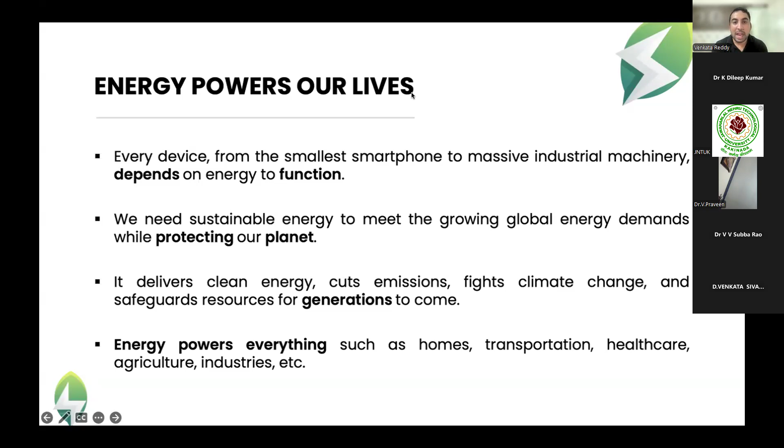And particularly what happens is we should think about these energy requirements, or the replacement of the non-renewable, whichever the space that we have - important topic and need of the hour that we are talking about. Everyone knows the world is moving towards these sustainable development goals, and most business people, entrepreneurs, and governments are all talking about the sustainable development goals.

Even renewable energy - this is SDG number 7, affordable and clean energy. Either way, we may reduce global emissions while utilizing these energy sources. So moving more onto these sustainable development goals, with that said, renewables on different scales - what is the present, what is the future, and how this is going to be - we are going to talk about that.

So the biggest challenge when people talk about this energy demand, I would like to bring to notice that AI is everywhere now. We talk about artificial intelligence, ChatGPT, LLMs - everyone building different solutions, but behind these AI solutions there's a biggest challenge: they need a lot of training, a lot of data, and a lot of support system to run. In the USA, a lot of data centers have been placed and created, running short of power, consuming maximum power generated from oceans, nuclear plants, and different energy sources. This is one big challenge that we have.

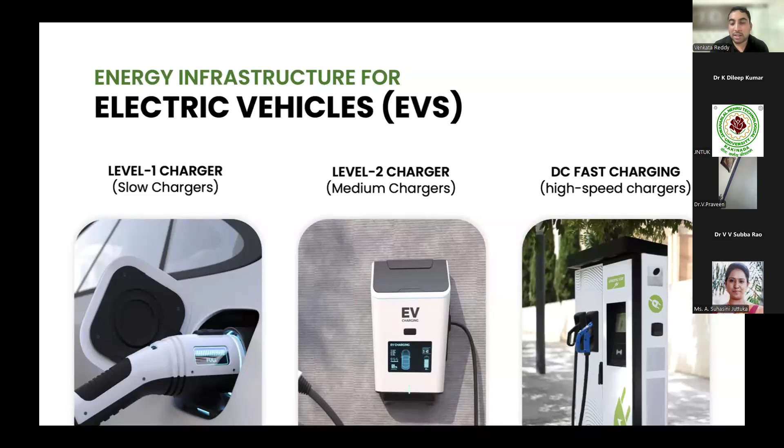So I am just touching on a few important resources required where energy demand takes on a higher scale. One is communication. Earlier it was just letters and things like that, but now communication has become top notch. Most of you know about WhatsApp and Facebook - one day they went down for half an hour to an hour, and the whole evening everyone was trying to communicate. Now communication itself has spread across the globe - satellites and all communication stations require an uninterrupted power supply.

So in coming days, there is a huge requirement for this energy, and we are extending this energy - everyone knows this, it's very common. Two problems I'm bringing to notice, where new kind of smart solutions are needed, or in the long run we need very uninterrupted supply, because without a mobile phone for an hour, 45 minutes, or half a day, I think the world goes into a panic situation. That is how we have to make sure all our energy resources are 100% effective.

So taking these three as major problems, and in order to give solutions, though we have other alternatives, I would like to propose the general renewable sources we commonly talk about: solar energy, wind energy, hydro, biomass, geothermal, tidal, and the present world is also talking about hydrogen.

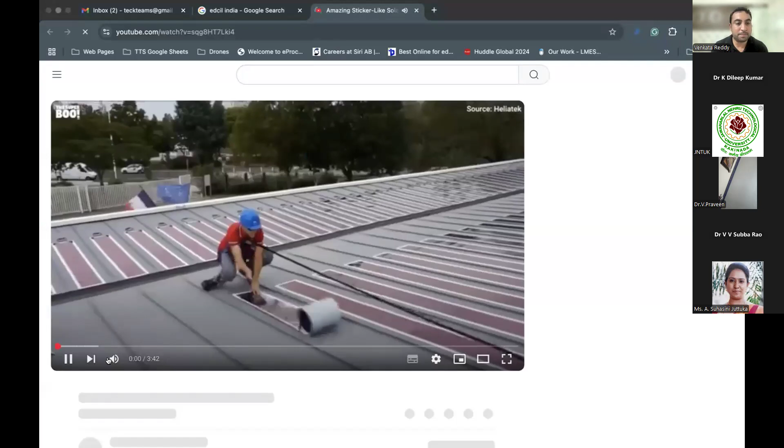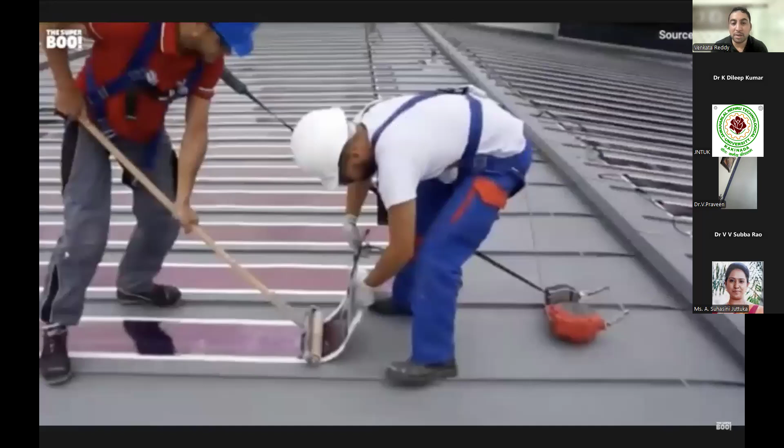When it comes to this, I have one link which will help us to understand. Let me show you this. Here you can see the new kind of art of solar panel, which can be placed at any place.

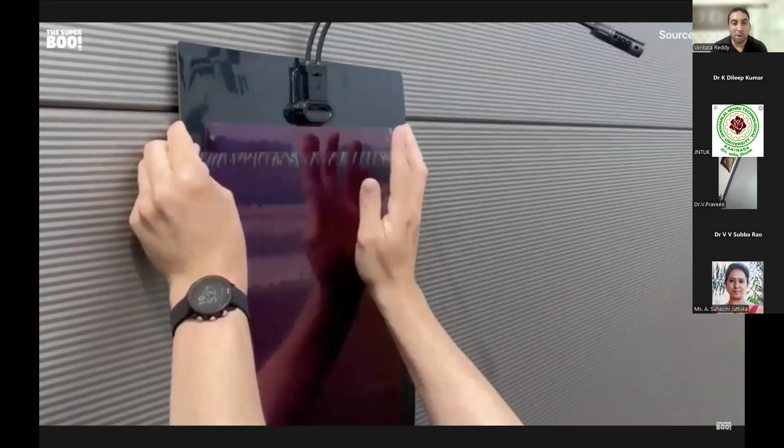Now you can see they are putting it on walls, using the same photovoltaic cell. Those are much more flexible than the traditional ones we are using, and you can stick it to any place, generate energy from any point, and it has more flexibility in the cleaning process as well.

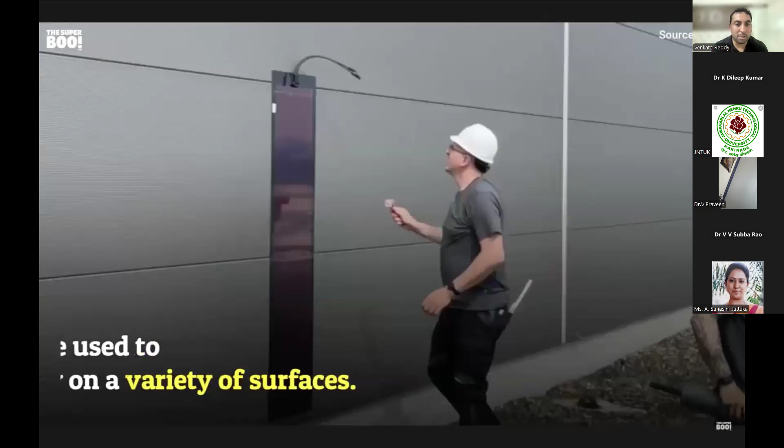If you observe, there is one company who has designed solar panels with this flexibility, and now I think Elon Musk has also come up with another panel which looks like glass. Those glasses can be used like window glass, and see how simple it is to fix.

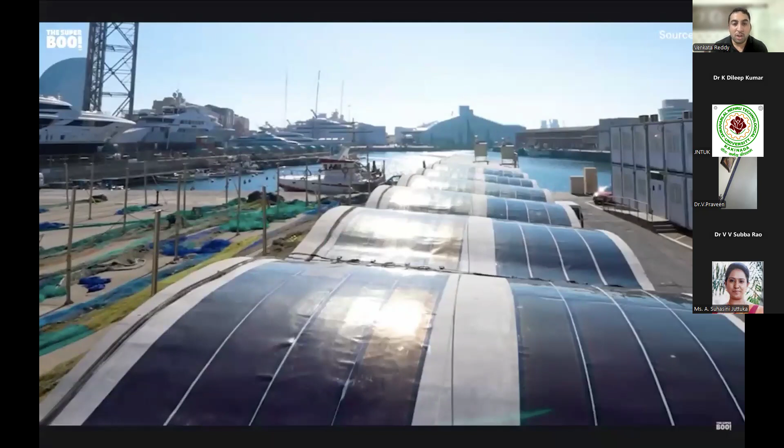Earlier it used to take a tremendous process, like you have to carry heavy things and go through a mechanical setup. You can see on the rooftop how this flexibility is there, as these kinds of solar panels come out and stick on.

So it's a company called HeliaSol by Heliatek. If you see that OPV, there's more next.

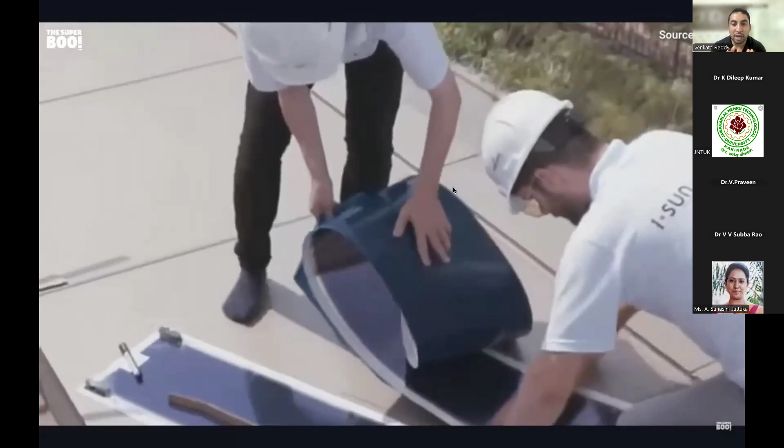Even the wind turbine—of course we'll talk about hybrid solutions also—but before that, you can just go through an understanding of individual smart solutions that are coming out. You might ask, like, what is the wattage, what is the panel, or what is the cost and all.

That all depends upon the application and the place where we are going to utilize it, that we have to look at. So they are using some organic material here. You can do some research on this and understand how these panels can be flexible in our country, where we have massive home locations.

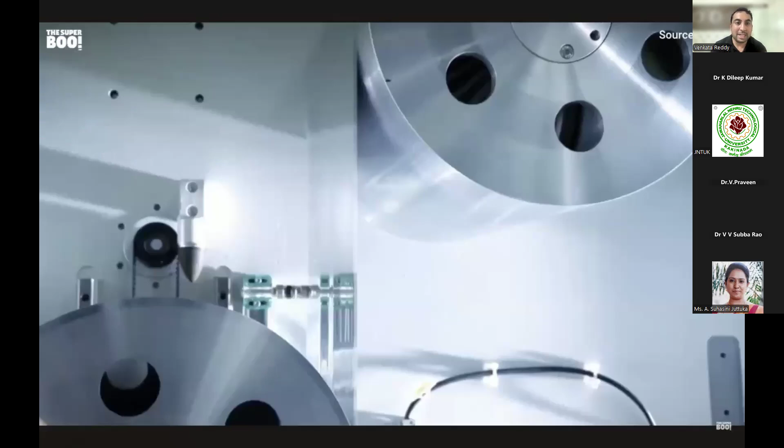If you can understand, the simple wall has been made into a solar panel wall right now, and it doesn't take too much time for them to install it. So this is how the flexible solar panel has come out.

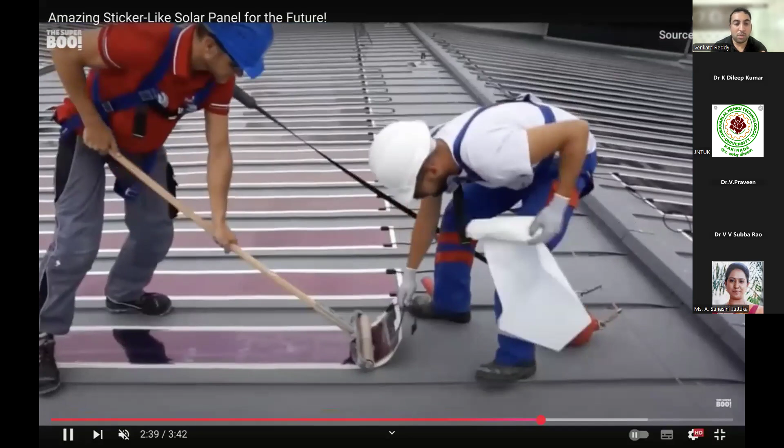So when compared to a regular format of solar energy that we take, or gigawatt units or megawatts that we pull out, these are the different kinds of solar energy systems that we have. And the example that you have seen is the smart solution that has come out, making it easy, and you can put it anywhere.

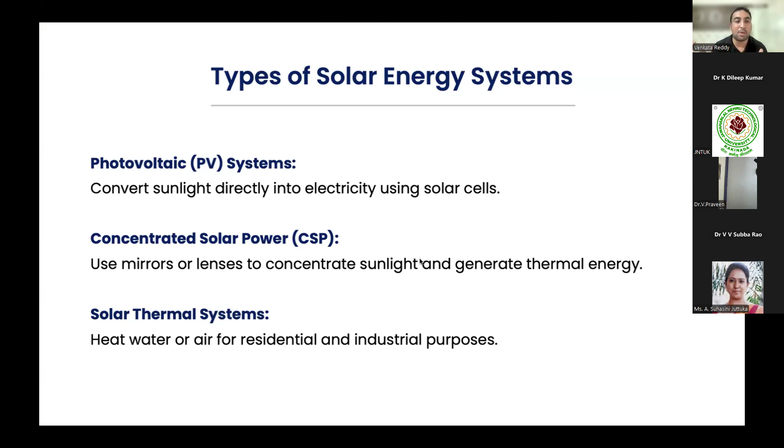On the other side, Elon Musk has come out with another solar panel, which you can search on Google, a solar panel which looks like glass. And the second biggest thing that most hilly areas talk about is wind energy.

Though it might be a little costly, and it can be done only in certain areas, I'll be showing you the new solutions, or innovative ideas, that have come out in wind energy.

Generally, wind energy, as everyone knows, works like this: whenever there is a huge wind flowing, there is a wind turbine that rotates. When it rotates, it generates energy, which we store and use.

At one point, Google, as a company, utilized these wind energy turbines—if you want rain to come onto a location, they would run these wind turbines to push the clouds to another side. So that is one technology that they have developed as a breakthrough.

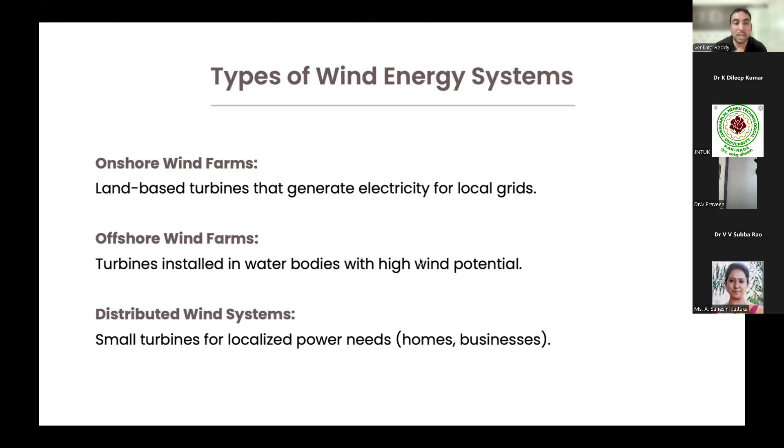When it comes to wind energy, the different types of wind farms that we have got: onshore, which is land based, offshore, which is done on water bodies, and distributed, which is like small turbines that we have got.

But coming to wind energy, the biggest challenge is the establishment and installation. It is not so easy and simple to install a wind turbine at whichever location you want. For example, in India, in Andhra Pradesh, you have got a certain hilly area called Anantapur, and they set up a lot of wind turbines. And if you see our Tirupati, which is a famous place for pilgrims, there you have got a lot of wind turbines that run on this wind energy as well.

But the challenge here is the wind blades; the establishment and the outcome of this energy is huge. And they have come up with something new: wind trees.

So when I say wind trees, earlier we were talking about solar panels. It's like a leaf, with a branch and a metal setup, and on the edges you used to have leaves. But here, when we talk about wind trees, you can see this.

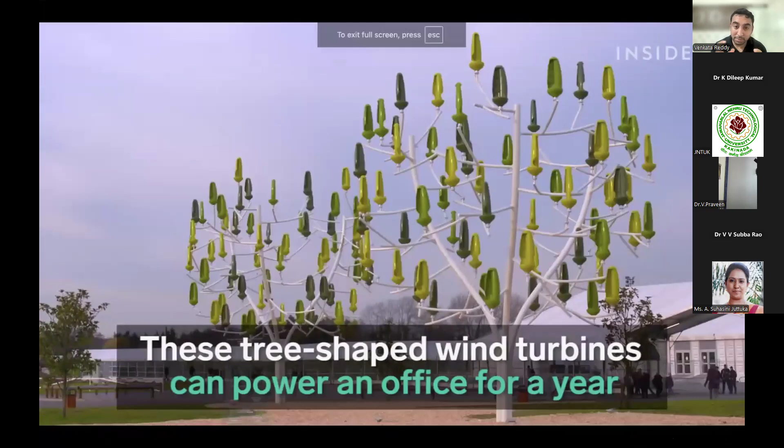This is a real model that they have created. If you see the tree shape and the wind turbine, the biggest challenge when it comes to technicality is not about the tree itself, but the model and structures they use, because wind flows at a lower rate, hardly like 10 meters per hour or something like that.

When it comes to that, see the rotation it is generating. That generates a very small amount of current. Though the voltage is low, I think the tree can handle it since it's very small. So here it's about 30 feet, and they are testing it.

And something simple you can do in a public domain. I think you can see it over here. So wind is at 5 meters per hour, so it's like 5 to 10 meters per hour. That is enough for it to function.

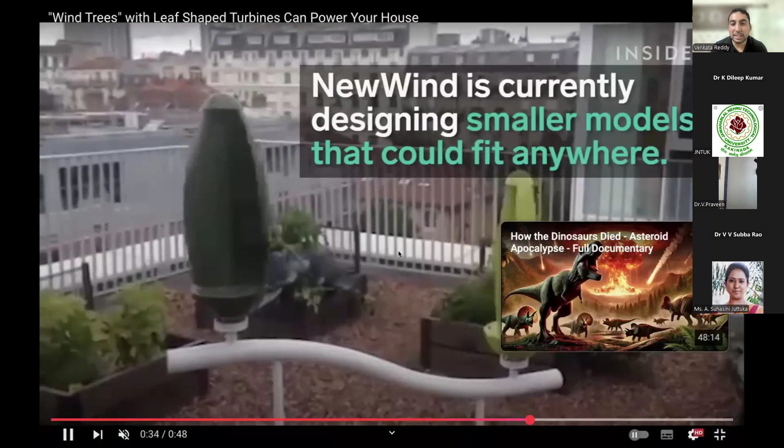And the R&D reason they have done this on these wind turbines is for different models too. These kinds of trees will help create a new kind of solution where you can combine solar with this wind approach. So these are different options in wind energy.

I want to show one more turbine. This is for a more domestic kind of thing. So if you can see this one, this is a structure. Of course, this real structure, when designed this way, can be used in households, or it can be installed.

Recently, someone has done something where, using this wind, they are generating water. So they are generating it from air. That's a different concept, of course. Here you can see different turbines.

And apart from wind and solar, there is another important aspect. So we have hydro concepts as well. There is hydro power, where we get parameters from large dam constructions, and the different stages of how they generate it from moving water. When it comes to water, you should have huge reservoirs or something very different.

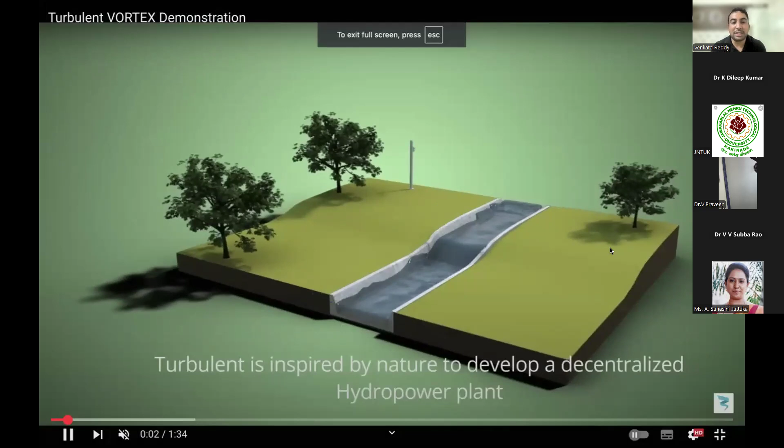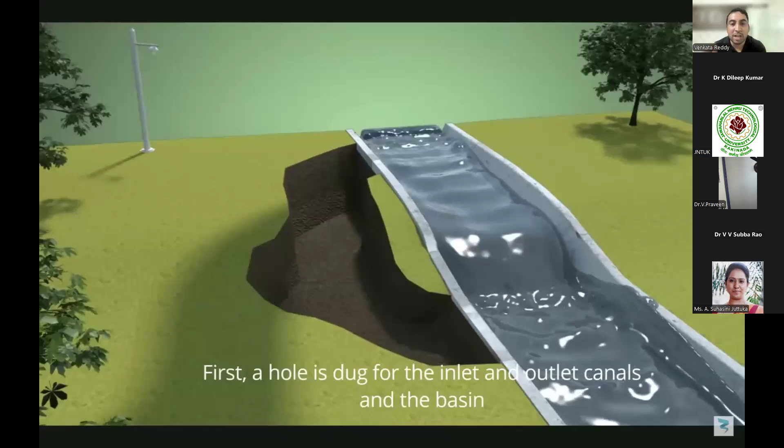The Vortex is one of the designs I felt was very convenient, where you can install it and see how this natural flow can be broken down. So when you see this prototype that they have made, and they have already been utilizing it in real time, but for ease and convenience of understanding, I'm showing this animated video.

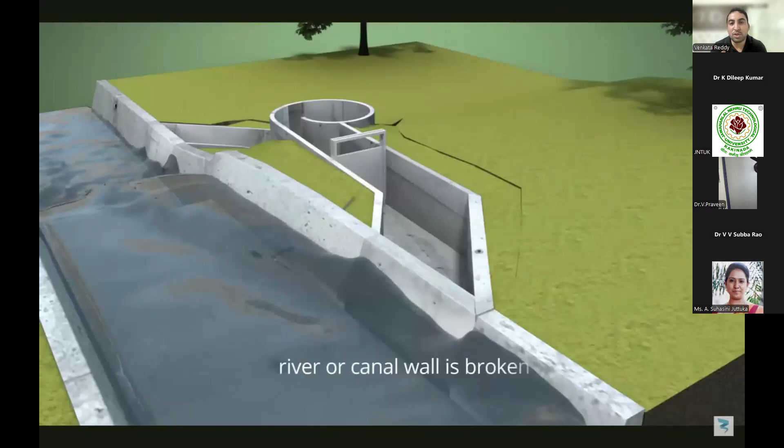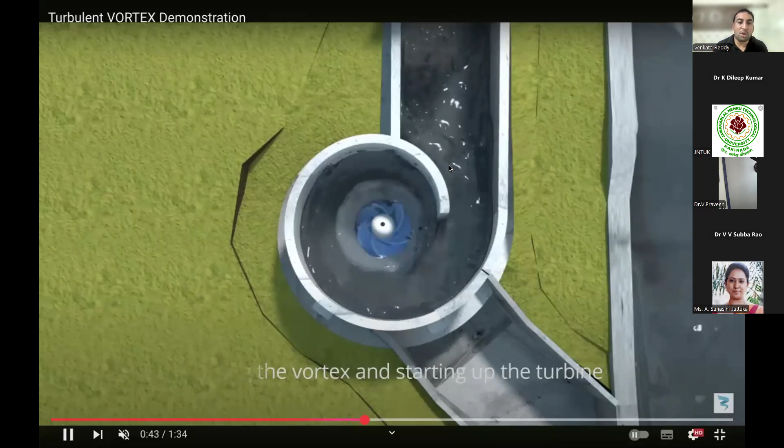So the natural flow that is flowing can be redesigned with a structure and a turbine as well. Now it has been covered, and if you just open up our natural flow of water into another direction, the same can be done, the same water can be flowed throughout this particular aspect. And if you see, once the water is full, you can understand, they just want to show the effect of it.

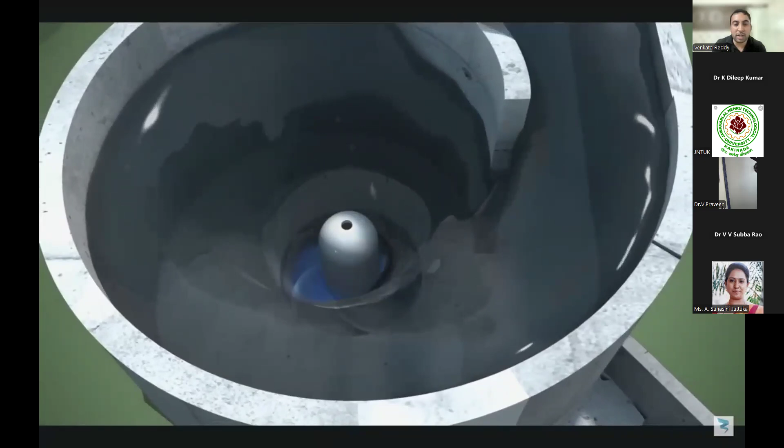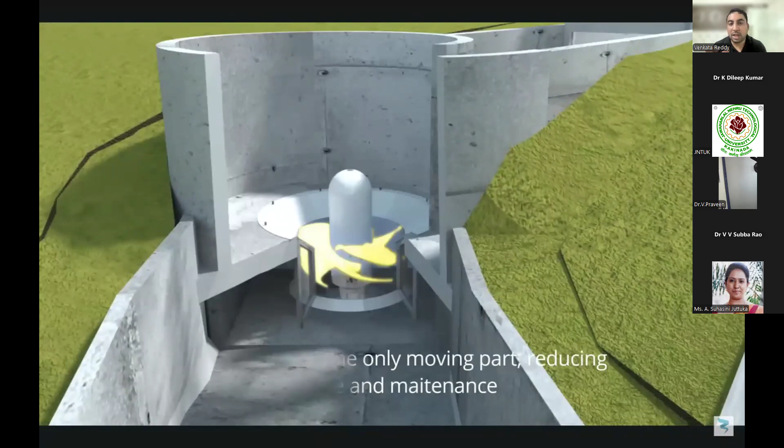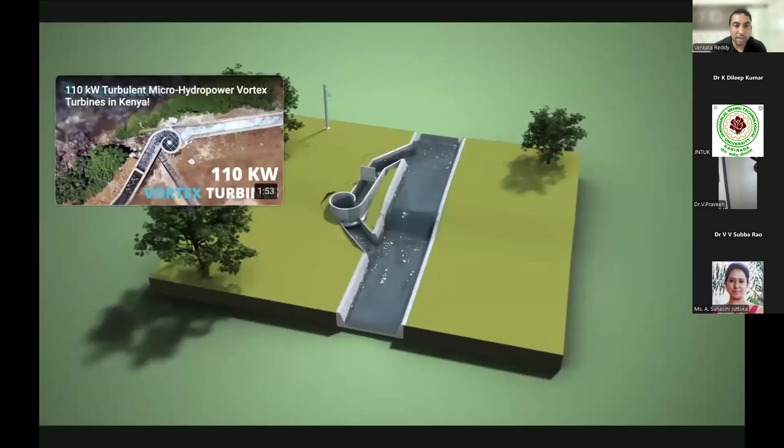Some research people are talking about China, where a lot of water flow is directly affecting the Earth's rotation. On this side, as per my understanding, that might have a cause when you construct a dam and stop the flow of water to an extent. It will definitely affect the natural ecosystem.

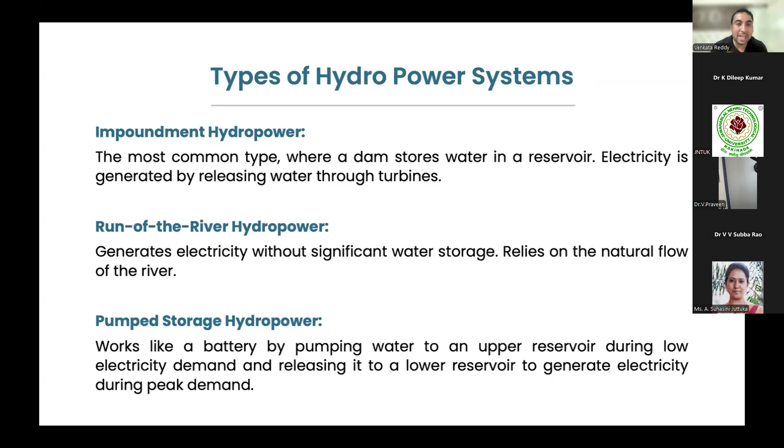So, adding on to this, the first three we talked about are mostly good on one side of things. And when it's urban, or when you talk about huge applications, solar, wind, and hydro are the biggest things. But the most underrated, and the one most people don't think of, is biomass, and waste. So when we come to natural energy, people talk about methane, which can be regenerated.

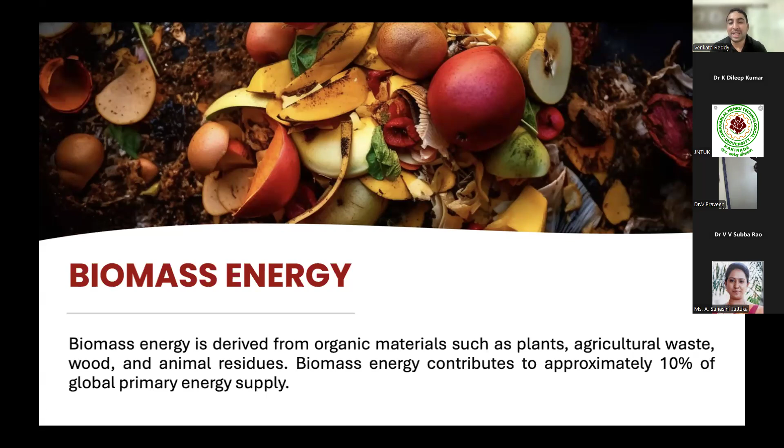There are a couple of concepts we can build on top of this. But of course, it requires a very clear understanding of exactly how we are going to separate this plant waste or agricultural waste and create this biomass.

Biomass is a good view. Now the government has taken a very big initiative. The government is already using this, or ethanol. And in the north of India,

Biomass that we use, I think most cultures see it, but unfortunately we are not utilizing it in urban areas. So we come down to creating this with all the organic and crop residue we have. It will be helpful for creating a better climate, and the best utilization of energy.

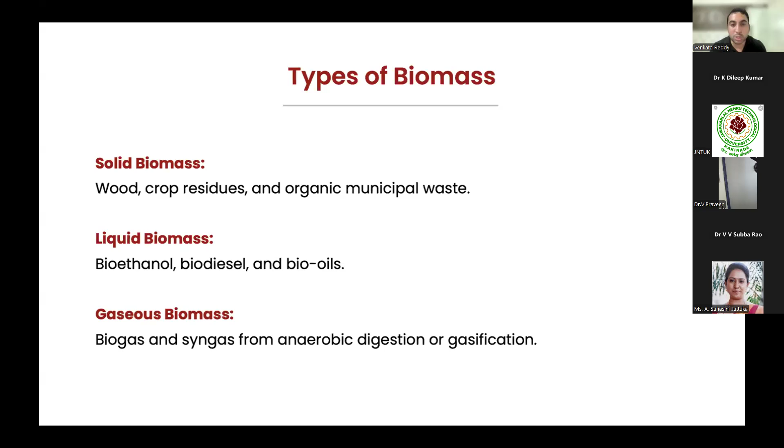Most people buy this. I think we can see the laundry persons, people who work with iron, they buy and utilize the coal, and start ironing shirts and all the dress materials. But the same can be torrefied, very naturally, which takes more time to burn and produces less smoke as well.

When we consume energy systems, it is very important to consider the emissions generated, because it indirectly or directly affects the ozone layer, and the smoke residue affects the air we inhale. Delhi-based areas are mostly affected by this pollution, so instead of coal or general burning, people can switch to pellets. On top of that, biomass is already used by most of us at home - vegetable waste and other scraps dropped onto plants to make them grow stronger and more fertile. This is one area we have to look at. Maybe today biomass isn't very viable given our lifestyle, but in the long run it will be an important aspect to pursue.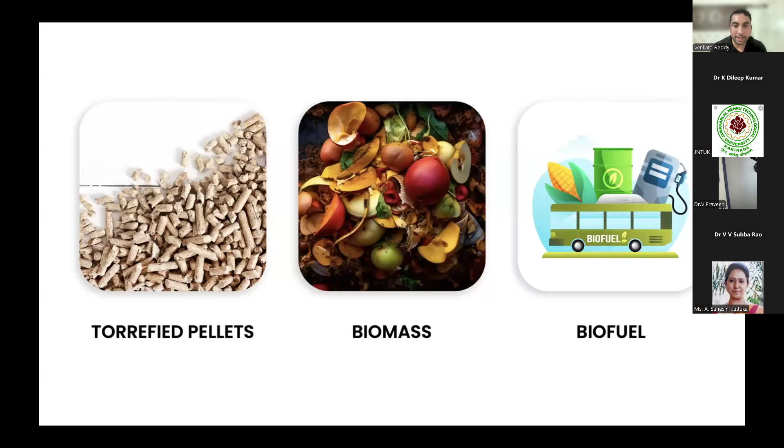So coming to geothermal energy - most of the plants we have, like NTPC and others, utilize regular consumption, but geothermal is an internal thing. I think China uses one of the popular geothermal energy setups, trying to take heat from the interior side, indirectly creating heat, and generating energy from the Earth's core. This involves some technicality, but it may be utilized for a lot of industries.

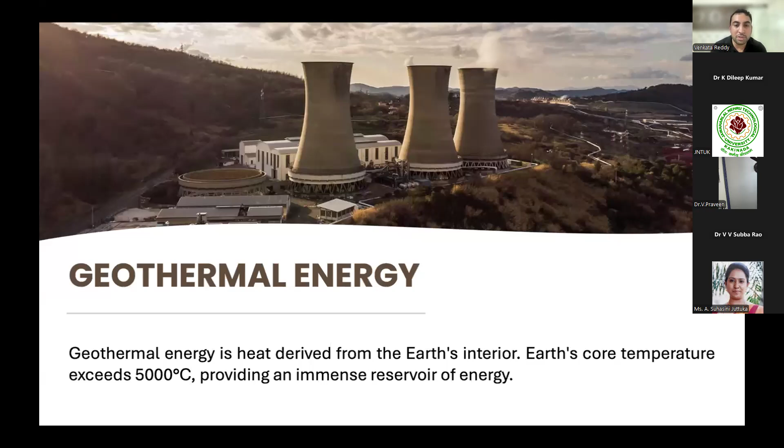When it comes to industries, these kinds of energies can be utilized in different ways - either directly for heating buildings, greenhouses, spas and other things. And when it comes to GHPs, the heat pumps, we talk about heating and cooling buildings.

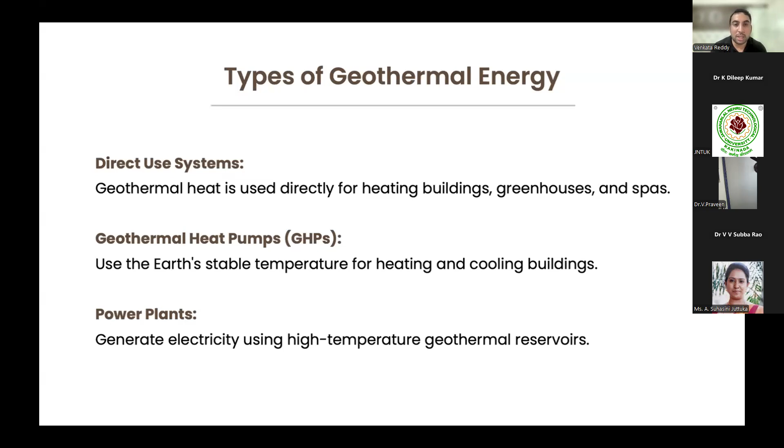Based on the Earth's temperature, we can stabilize this. Though this concept isn't widely in the picture yet, it's an idea we can still work on, and a lot of research needs to be done, because the planet has a lot of different temperatures and different seasons. Depending on the place - for example San Francisco or Nevada - they go with higher temperatures of 60, 70 degrees sometimes, and lower temperatures like -5, -10 also. So this is how geothermal energy can be helpful from a larger perspective.

So coming to these different concepts - solar, wind, and hydro are one kind of aspect we can look at and proceed with for upcoming energy requirements. Whereas biomass and geothermal are the biggest challenges, because they have to be created from nature.

Last but not least, tidal energy - most of you have seen oceans, and inside the oceans, tidal energy generates huge massive energy based on the waves. I couldn't get pictures, but I can show you on YouTube. Let me show you a small video of tidal wave energy, which has very recently been developed with these kinds of aspects.

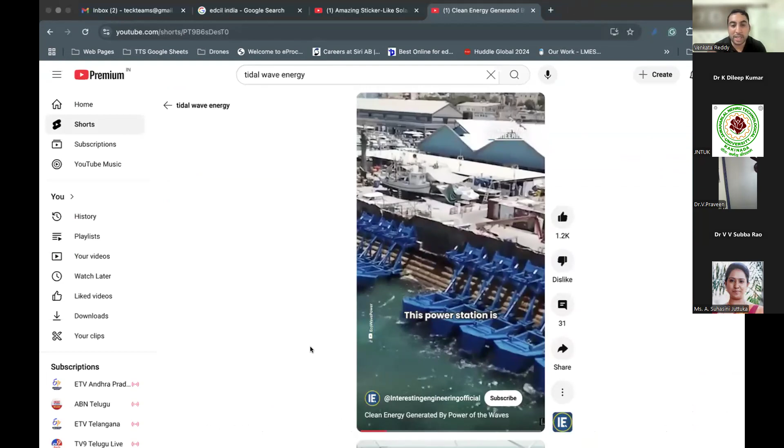Based on the design factor, you can see the wave movement - based on the wave, this goes through hydraulic functionality, moving up and down. This natural movement happening because of the waves produces energy. I think in Dubai, or outside Dubai, many places are trying to install these kinds of tidal wave generators.

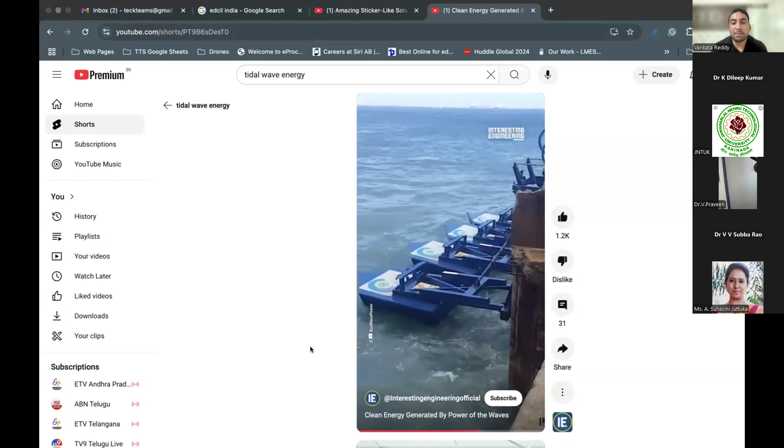If you ask me whether we're going to get huge energy from these or not, as per the constraints, all these renewable energies are costly. They might require big setups for installation, and on top of that, the outcome - the power generation - might take a little energy consumption, or the installation process might take time.

Let me show you one more, which is based on the turbine. Apart from this... no, this is an internal one.

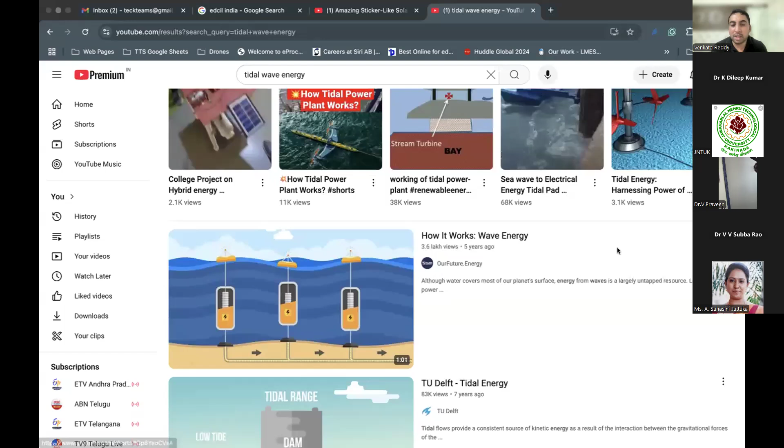So this is one kind of internal design that you can see, the tidal one on the picture. So this is something, the internal turbines under the sea. So this will help them to generate the energy. I think this video might help us to understand.

So it has got AI based stuff. Okay, we'll leave it for time being.

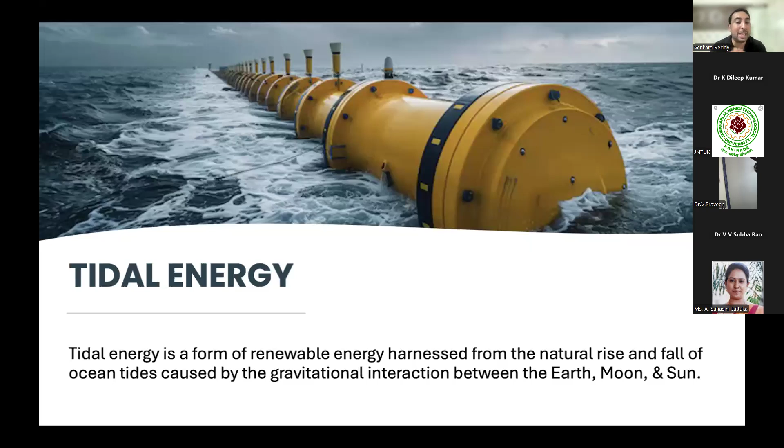So tidal energy is one of the important aspects that we have to look at. And though it is little difficult for installation, or it is going to take time for us to present the generation of outcomes also, but on a larger perspective, as everyone knows, when compared to land, there is 3 times much space on the oceans, right? So we can use this tidal energy as one of the important renewable energies, and at the same time, the energy that is going to be generated again has to be taken on a cable kind of system.

So on top of all these things, people right now are talking about hydrogen, but from my perspective, hydrogen energy is something again we have to talk about solar, we have to talk about wind, or some or the other way we have to generate this hydrogen energy, which has to be again clean energy. So talking about green energy or clean energy, we will have to talk about hydrogen. So the natural stuff that we have got, or the process that we are going to make, maybe it is little difficult for the storage, for the generation, and for establishment, as we are not going with nuclear plants.

I think most of you know that we have lot of resources, what to say, nuclear plants, but unfortunately the effects of nuclear plants also has got a lot of cons as well. So that is why government of India, or at least some state governments, are not ready to go ahead with the nuclear plants, because once they go with nuclear plants, if there is a small mistake happens in nuclear energy, that will affect a larger value.

So comparatively, they are coming up with hydrogen setups like Adani, Ambani. They are establishing a bigger version of hydrogen plants. And I think four-wheelers as well as heavy trucks are coming up with hydrogen cylinders where you can fill hydrogen and you can execute it. So hydrogen is going to be one more resource for us, though it is taking time, it is a costly affair.

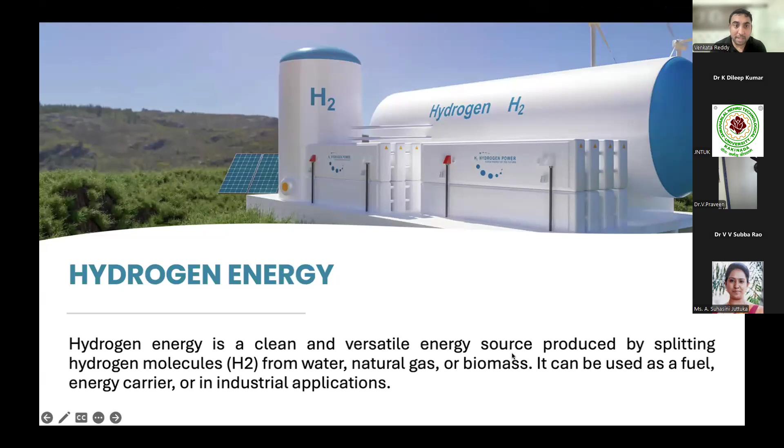So now we are looking for alternatives, and if the alternatives work, I think we will be sustainable instead of using coal and other natural resources, moving toward a different concept altogether.

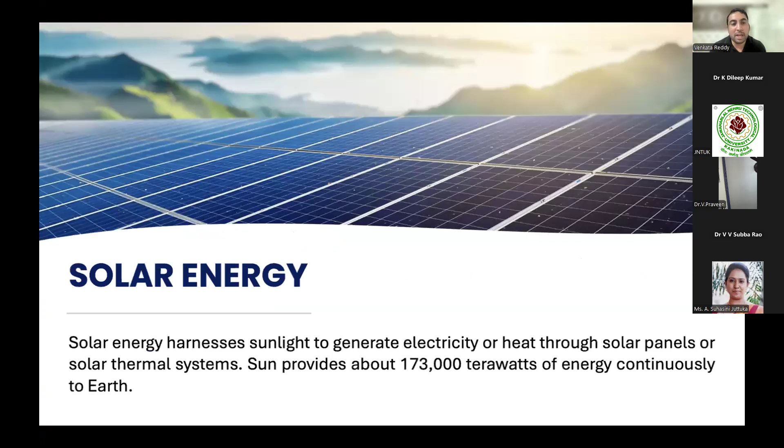This process can also be called a hybrid model. When I talk about hybrid model, it means solar-wind energy, hydro-wind energy, biomass, or multiple components that we can try out. But it all depends on the possibility with climate conditions, and certain areas are good with these resources. Companies also have to come out with different kinds of solutions along these lines. These are the different aspects I'm looking at from the renewable sources that we have got.

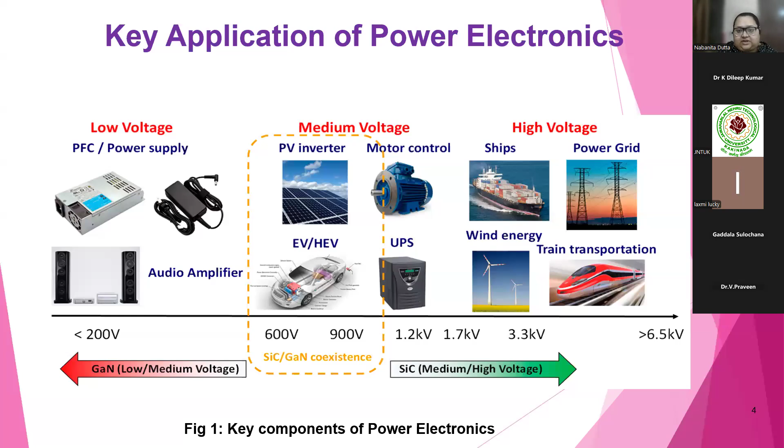Then FACTS devices, STATCOM devices, then vacuum circuit breakers, magnetics, high voltage transformers, voltage sensors, high power current sensors, and some heat sinks. These all come under high voltage applications. So now I move to the overview of the smart grid energy system.

The smart grid energy system integrates advanced technologies to optimize energy production, distribution, and consumption. It uses real-time data, automation, and intelligent control mechanisms to enhance efficiency, sustainability, and reliability. Nowadays we are using AI tools and AI applications in smart grid systems to make it more optimized and based on emerging technology.

The key features of smart grid energy systems are integration of renewable energy sources, real-time monitoring and control, bidirectional energy flow, energy storage, and the use of automation and artificial intelligence. I will elaborate on these.

Integration of renewable energy means supporting distributed energy sources like solar, wind, and hydropower, which are seamlessly integrated into the system. This gives flexibility in energy generation, handling more energy-efficient production from renewable sources using advanced forecasting.

By using AI tools, we can forecast power generation, detect faults happening in the system, and apply balancing techniques.

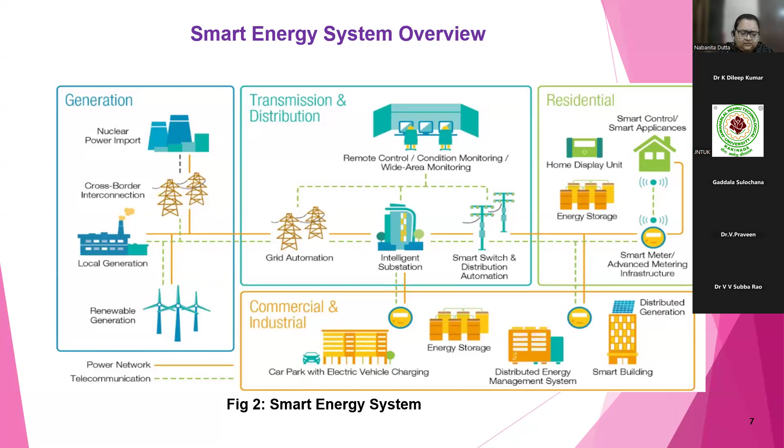For transmission, we can make the grid an automated system that we can control remotely, which comes under condition monitoring and health monitoring systems. Then the intelligent substation - nowadays the old process has been removed and new techniques are introduced, and these are coming in upcoming days also.

So mainly for this system, power electronics - now I will discuss various power electronics components like power converters, semiconductor switching devices, passive components. I already told what components are there, but I will still elaborately describe them. Then control and protection devices, advanced semiconductor materials and sensors. So these are the key components.

The smart energy system integrates advanced technologies and renewable energy. For renewable energy, we use solar photovoltaic systems (PV systems), wind turbines, hydropower plants, biomass systems, geothermal energy systems, and traditional power plants where we use coal, gas, and nuclear power.

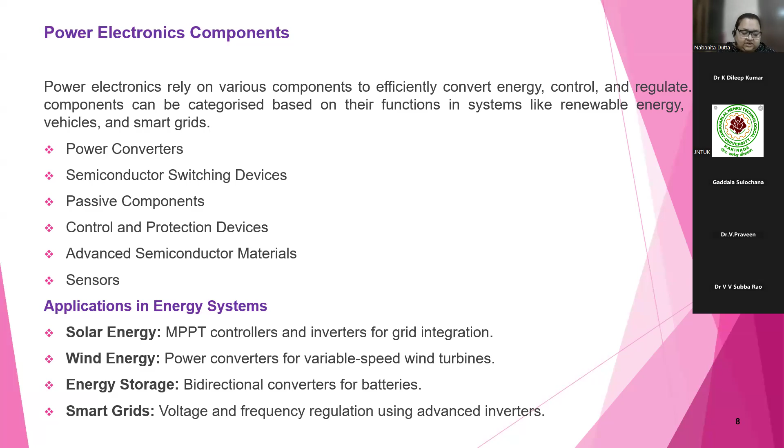Solar power plants mainly use solar panels, battery backup systems, and various types of inverters for grid integration. Then wind energy systems use wind turbines, generators, wind power generators. Then energy storage uses bidirectional converters for batteries, and smart grids use advanced inverter techniques for voltage and frequency regulation. So these are mainly the applications of power electronics components.

Power electronics plays a vital role in solar power applications. We use inverters, and power electronics utilize MPPT controller techniques to continuously adjust the electrical operating point of modules or arrays, ensuring they operate at the peak level for maximum energy harvesting.

Power electronics ensure the AC power matches the voltage, frequency, and phase. In battery storage, power electronics match the charging and discharging cycles of the batteries, ensuring optimal performance and longevity, and power quality improvement is also possible.

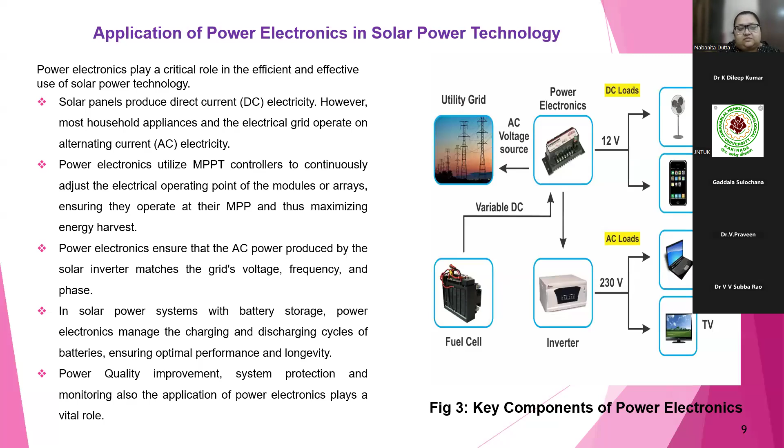Power technology includes the energy management system, which monitors and controls energy storage using supervisory control and data acquisition - real-time monitoring and operation is possible, enabling grid automation. This ensures incorporation of various standards like IEEE standard, IEC standard. Based on that, smart meter systems are possible, and there are lots of applications in the solar power system in the field of power electronics.

There are two systems: one is off-grid system and another is grid-connected system. In the grid-connected system, a smart grid or power grid is required. But in the case of off-grid, there is a charge controller and battery storage system to store the energy - this is required. Off-grid systems are mainly used for remote places where it's not possible to install grid-connected systems, such as in mountain areas or remote areas where we cannot fix a grid-connected system.

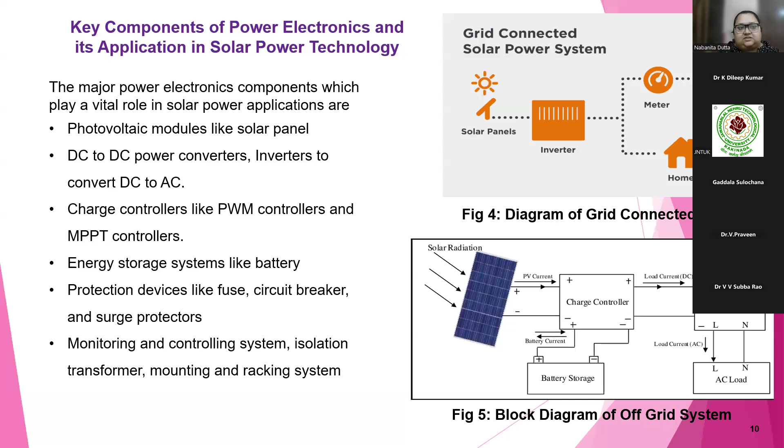Now there are various types of inverters used in solar power systems, because the solar panel, which is the main component of solar power application, generates DC. So we need to convert it to AC because our household applications are AC. For this conversion, there are various types of inverters, like string inverters - there are lots of inverters. In the upcoming slide I will explain.

Then there's DC to AC conversion for maximizing energy harvest, grid synchronization, monitoring and communication, safety and protection, and battery integration and management. The fundamental function is to convert DC power to AC power, using MPPT controller techniques to ensure solar panels operate at the maximum power point level, adjusting the electrical operating point to extract the maximum possible power and enhance overall energy efficiency of the system.

Inverters ensure the AC power generated is synchronized with the grid voltage, frequency, and phase level. This synchronization is critical for safety and for efficiently feeding solar power into the grid.

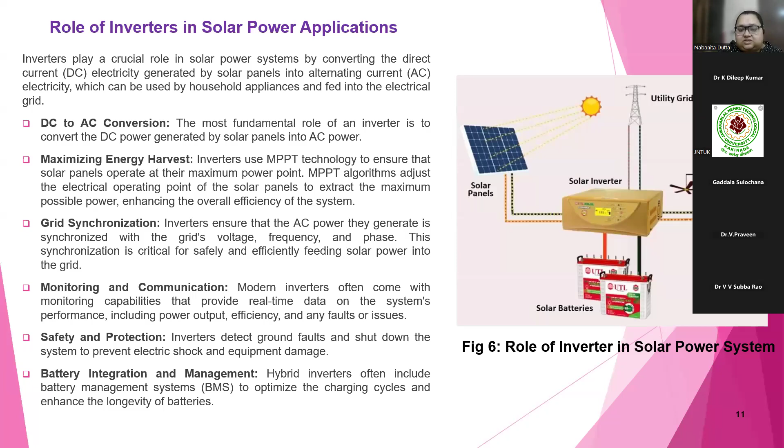Modern inverters often come with monitoring capabilities that provide real-time data on system performance, including power output, efficiency, and any faults or issues. For safety and protection, inverters detect ground faults and shut down the system to prevent electrical shock and equipment damage. Hybrid inverters also now often include a battery management system to optimize charging cycles and enhance battery longevity.

There are mainly six types of inverters we can see: string inverter, central inverter, micro inverter, power optimizer, hybrid inverter, and battery based inverter.

String inverters are suitable for residential and smaller or medium commercial solar panel applications. Central inverters are used for large power plants, large solar farms, storage systems, parking areas, or charging systems.

Micro inverters are used for residential installations with partial shading or complex roof structures, where panel level monitoring and optimization are required. Power optimizers are used for both residential and commercial purposes, for energy production and for partial shading and varying panel orientation.

Hybrid inverters are ideal for systems that include energy storage, enabling the use of stored solar energy during non-sunny periods and during power outages. Battery based inverters are used for off-grid applications where a continuous battery backup system is required, independent of the grid tied system or power supply.

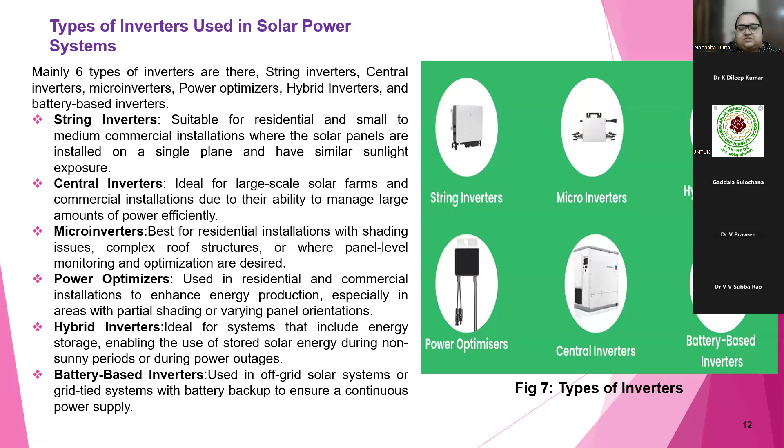Another important component is the charge controller. If we use an off-grid system, we need the charge controller for continuous charging and storage of energy. This is mainly used for solar power battery backup systems.

Mainly two techniques are used: pulse width modulation control and maximum power point tracking, MPPT controller technique. The PWM charge controller uses a switching mechanism to gradually reduce the current to the battery as it approaches full charge. Once fully charged, it disconnects and maintains the voltage at a safe level.

It is cost effective and reliable, ideal for small off-grid systems that are cost sensitive with a very lower cost requirement. If anyone wants to install basic charging stations with converter based techniques, PWM is mainly used.

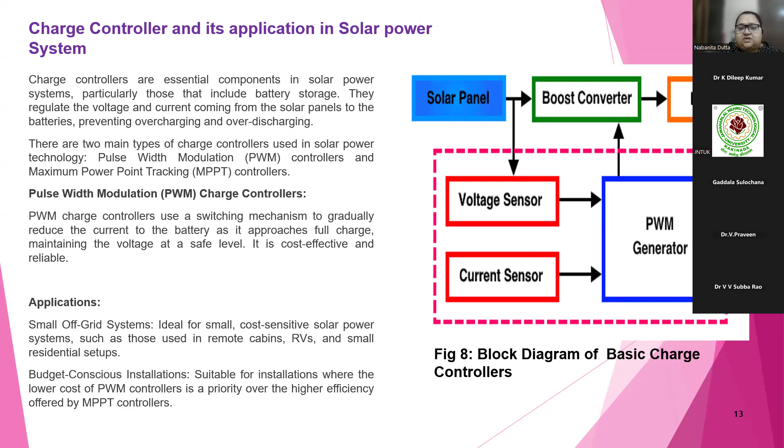This ensures that the system operates at its maximum. Solar panels have a non-linear power output curve, and their power output varies with changes in sunlight, temperature, and different load conditions. For this reason, the MPPT technique is the best suited method.

MPPT works through monitoring and adjustment for optimization, and is mainly used in charge controllers, grid tied inverters with MPPT, hybrid inverters, and micro inverters. The benefits are increased efficiency, better performance in variable conditions, maximized energy harvest, and improved battery life.

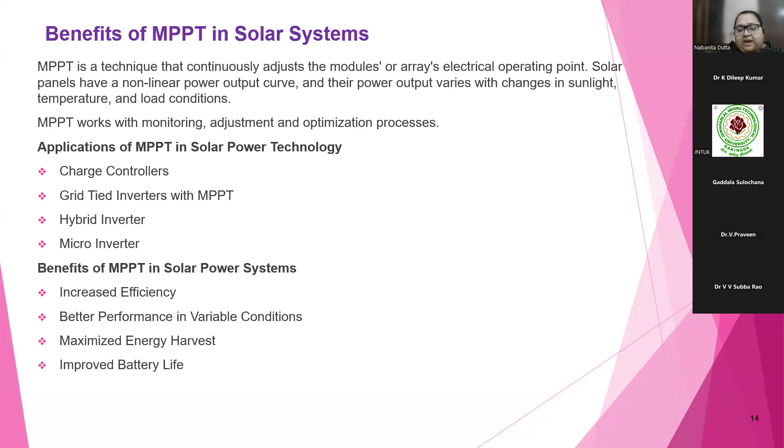There are also many DC-DC converters used in power electronics applications in solar power systems: the buck converter for step down purposes, the boost converter for step up purposes, and the buck boost converter, which is mainly used along with the MPPT technique as a more complex module.

Along with that, there are Cuk converters and SEPIC converters. They play a vital role because they ensure that electrical energy is correctly managed and utilized. The choice of converter depends on the specific requirement of the solar power installation, and usage and application, based on size, configuration, and the efficiency the customer requires.

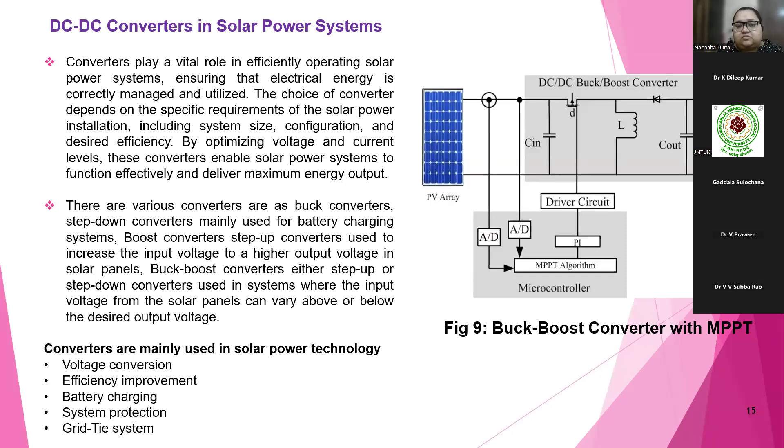Converters are mainly used for voltage conversion and efficiency improvement, battery charging purposes, system protection, and also for grid tied systems. Now let's look at how energy storage systems are integrated with this system. Energy storage is a vital component, and that is the key reason why energy storage systems are used in solar power systems.

That is energy supply consistently, then energy impedance reliability, then load shifting and peak shaving purpose, then integration with renewable energy, and grid services and support, economic benefits and environment impacts.

The latest development of energy storage technologies in 2024 reflects significant advancement and trends aimed at improving efficiency, reducing cost, and enhancing sustainability, battery overproduction and pricing. Government incentives and policies also introduce new energy techniques for energy storage system for transport integration, electric vehicle infrastructure, and to promote recycling and reuse of energy, waste energy management, and optimized energy solutions.

For these reasons, energy storage systems are increasingly used day by day. It is mainly used in extreme weather conditions, short duration requirements, and off-grid systems. For consumer adoption, the energy storage systems are used for battery backup systems, energy conversion, and energy condition monitoring.

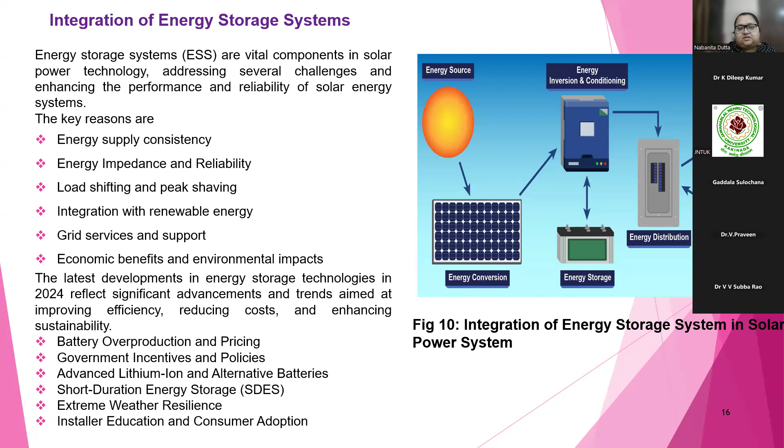There are two systems that are used. One is the grid-tied system and another is the off-grid system.

Generally for residential, commercial, utility grid system, solar farms, and urban areas, grid-tied systems are used. The advantage is they are cost effective because there is no battery, no extra money required for the storage system. Excess energy can be sold back to the grid, providing financial benefit, and there is continuous power supply as the grid acts as a backup system.

The challenges include dependence on grid stability, power outages, regulatory and policy changes, and issues related to the net metering system and feed-in tariffs. If tariffs are somehow high, that case will not be good.

Off-grid systems are independent of the utility grid. They rely entirely on solar energy and battery storage systems. Generally they are used for remote areas, recreational areas, emergency areas, or sometimes for short portable uses.

They provide complete energy independence, are not affected by grid outages, and offer sustainable and reliable power supply for remote locations, along with smart charging system infrastructure and battery resource utilization for demand response optimization. They reduce the need for costly infrastructure and promote renewable energy integration. For these reasons, these systems are used.

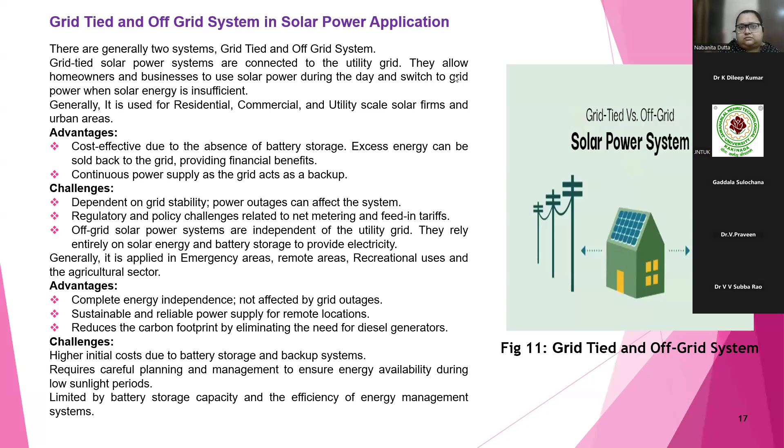So, now I will... Any problem, ma'am? No, actually it was not moving. Yeah, it's moving now. Okay.

Now I will discuss a case study. It is paper-based work; I have taken it from one paper. It's a common paper where they have done a case study in the Navi Mumbai area for their RRL lab, calculating the irradiance of the solar power system. It's a rooftop system they are planning to install, and based on government subsidy, they calculated how much cost saving is possible, and how the power backup system has been done, proving it through calculation.

They mention the site, and irradiance is defined as the average daily insolation, which depends on the summer, winter, and monsoon periods - the irradiance will vary in different periods.

Based on the available rooftop area, they used only 10 solar panels, each with 72 monocrystalline cells, and each panel has 350 watt power. The total plant capacity is 3.5 kilowatt, and a 4.6 kilowatt dual MPPT inverter has been used here.

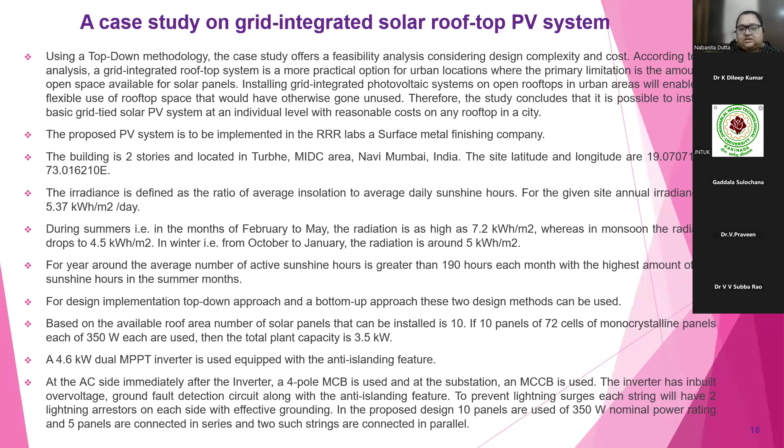These are the electrical and mechanical data collected from the paper: peak power, maximum voltage, maximum current, open circuit voltage, short circuit current, and efficiency. The solar PV panel was chosen based on this table. Then irradiance is calculated based on the irradiance level and sunlight availability, assuming 9 hours of daily sunlight.

During summer, average irradiance is 6.75 kilowatt hour per meter square, so they calculated total irradiance is 750 watt per meter square. During monsoon, it will be reduced somewhat because sunlight will not always be available. In that case, it comes to around 538 watt per meter square, and during winter it is somehow low, but not like the monsoon period. It is 590 watt per meter square, and VMP and VOC remain the same.

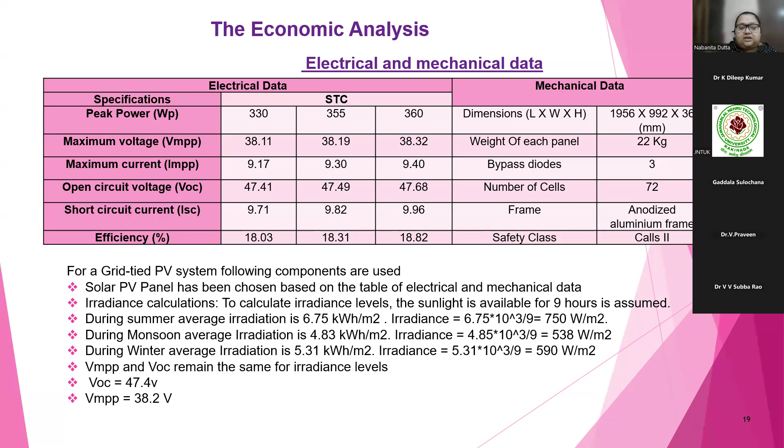They also mention 47.4 volt and 38.2 volt, and they calculated that during the summer period, if irradiance is 750 watt per meter square and sunlight is available, then it is totally calculated. ISC value will come to 7.32 ampere, and IMPP value will come to 6.93 ampere. Then PMPP comes to 264.72 watt.

So the total units generated during the summer period per panel, based on power and the number of hours sunlight is available and the number of days, they counted 120 days. Total unit generation is the total power multiplied by 8 hours sunlight availability and 120 days, so 254.18 units per panel are generated. Total units generated during summer, using 10 solar power panels, comes to 2541.8 units.

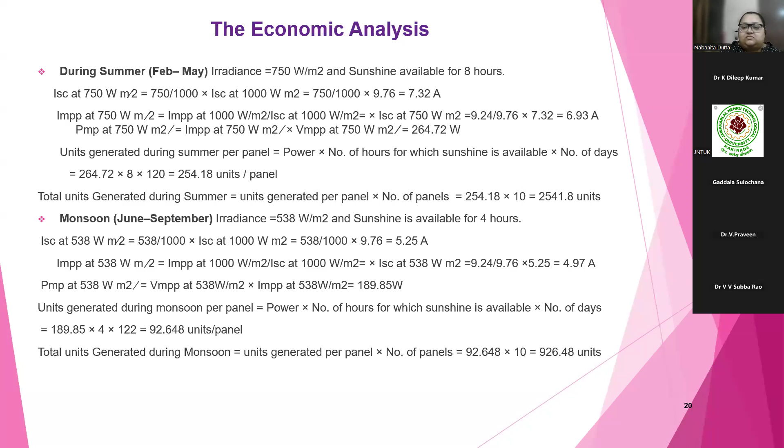Similarly for monsoon, they calculated it, and it comes slightly lower - 92.648 units per panel, and total units generated during monsoon is 926.48 units. In winter, sunlight is available for 7 hours, so values come a little lesser than summer. Total units generated come to 178.91 units per panel, and total units are 1781.9 units.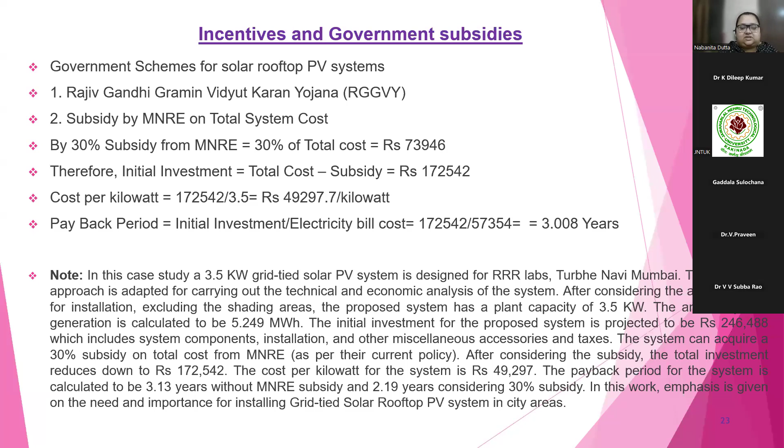So this is one case study.

Now I will move to the role of power electronics in wind power applications, because similar to solar power, there are lots of applications in wind power too. Power electronics plays a vital role here - enabling efficient control generating systems, with doubly fed induction generators used for wind turbine systems, regulating speed and torque, and extracting the maximum power point for wind energy.

Variable speed operation allows turbines to operate at variable speeds to optimize energy extraction under varying wind conditions, reducing mechanical stress on turbine components and extending their lifespan.

Then power conditioning and conversion - AC to DC and DC to AC conversion - converts variable frequency AC output from the wind turbine generator into grid-compatible fixed frequency AC power. DC link stages are used via rectifiers and inverters to ensure smooth and efficient power conversion, along with power factor correction to enhance the quality of power delivered to the grid.

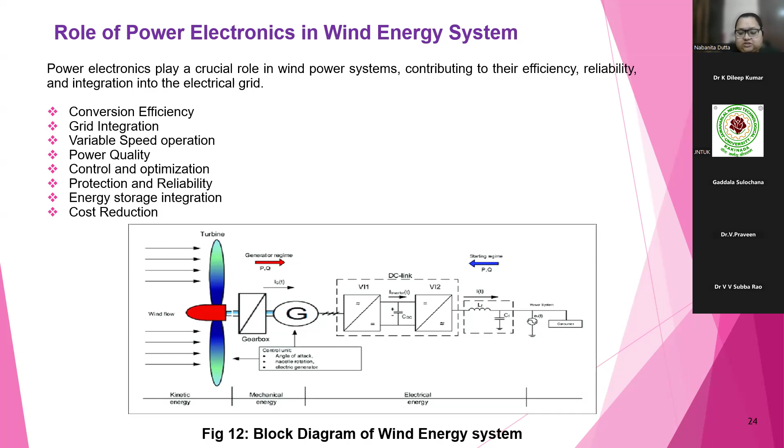Then there is another application: hydropower and biomass energy. There also power electronics plays a vital role for efficient power conversion, variable speed operation, grid integration, and stability.

Then for power quality improvement, dynamic control monitoring, energy storage integration, environmental impact reduction, microgrids and off-grid applications, power electronics regulate the output of hydropower generators like synchronous and asynchronous types to ensure efficient energy conversion.

They provide precise control of generator speed and torque to match turbine output with varying water flow conditions. Variable speed operation allows turbines to operate at varying speeds, improving efficiency across a range of water flow rates.

Then for grid integration, AC to DC or DC to AC conversion converts the variable frequency AC output from the generator into grid compatible fixed frequency AC power. Then voltage and frequency regulation ensures power delivered to the grid matches required voltage and frequency standards.

Here also STATCOM and SVC are used, reducing harmonic distortion in the power conversion process and improving power quality. Control and monitoring techniques include turbine control, load management, pump storage systems, and variable speed drives used to adjust speed.

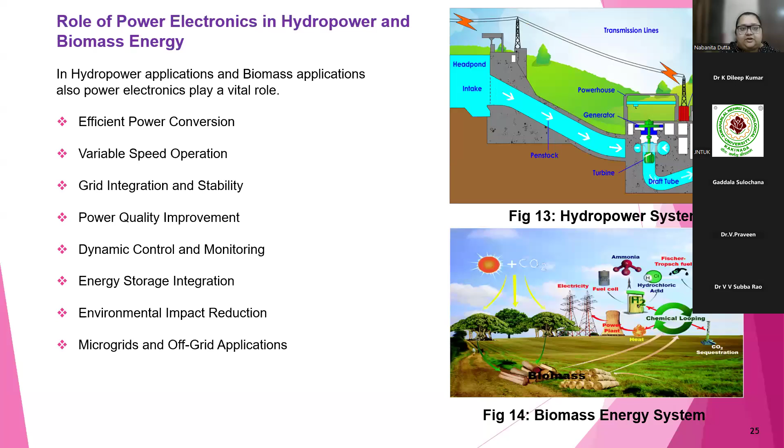Now for smart grid integration: a smart grid is an advanced electricity network integrating digital communication, control systems, and renewable energy. Its main motto is to optimize energy production, distribution, and consumption.

Energy flows through the utility grid, grid stability systems, or battery management and storage systems, with the main role being to convert energy, store energy, minimize loss, and make the system cost effective. For system monitoring, real-time monitoring is very much essential.

For that, AI tools or machine learning techniques can be used to monitor grid utility or the monitoring system. It can integrate the whole renewable energy system, demand side management, support for energy storage systems, and bidirectional power flow.

Then the challenges facing smart grid integration include high initial investment. There are lots of costs that need to be borne by the customer to install the smart grid system, and compatibility issues also exist with the existing infrastructure.

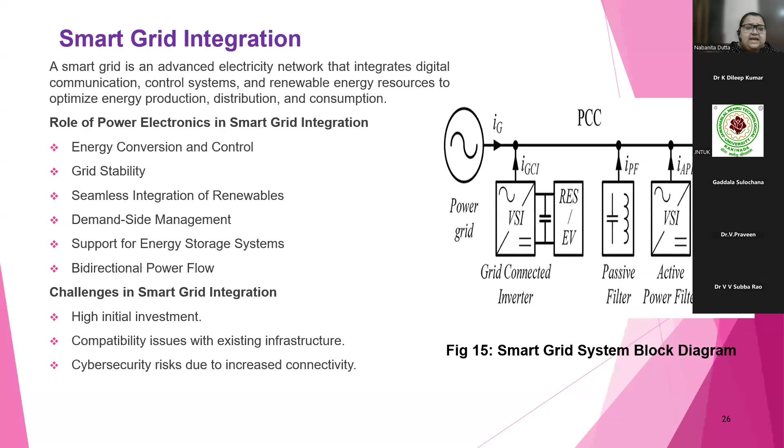And for smart monitoring systems used in off-grid systems, there is a chance of cyber security risk or smart theft, meaning power theft issues can occur. So these are the key challenges seen in smart grid integration.

So previously, now I move to the various applications of semiconductor based components that are recently being used, and in the future mainly these components will be used, because previously we were using various normal IGBTs, normal MOSFETs, and these things.

Nowadays key advanced semiconductor-based techniques are being used for power electronics components to improve efficiency, performance, and scalability across a variety of applications, including renewable energy, electric vehicle applications, and industrial automation. These have high power, high efficiency applications, and they are replacing the traditional silicon-based devices.

Devices introduced like the silicon carbide device - SiC is a wide bandgap material with superior thermal conductivity, higher efficiency, and greater power density than traditional silicon-based components. It is ideal for high voltage applications and high temperature and high frequency applications, where charging controller systems, charge stations, and battery backup systems can use this component.

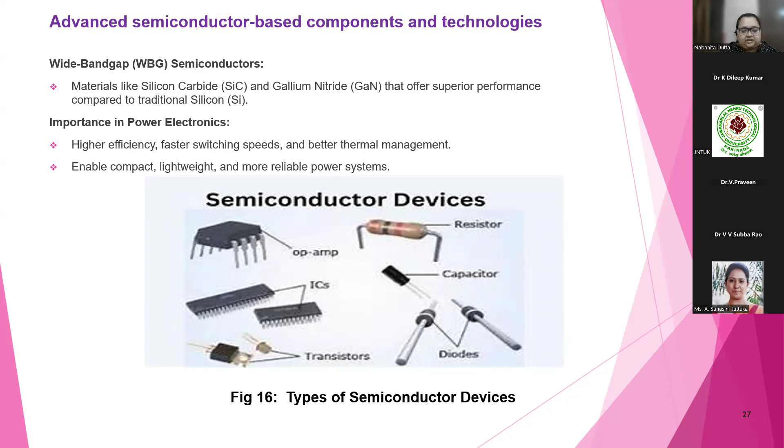For inverters, motor drives, power converters, high voltage and current handling, and high voltage and high current applications, and power rectification purposes, these devices can be used.

There are some advanced IGBTs used for high power applications, industrial motor drives, and high power renewable energy inverters. Super junction MOSFETs are used for high efficiency in medium power applications with improved performance at lower switching frequency, for LED lighting systems and electric vehicle charger systems.

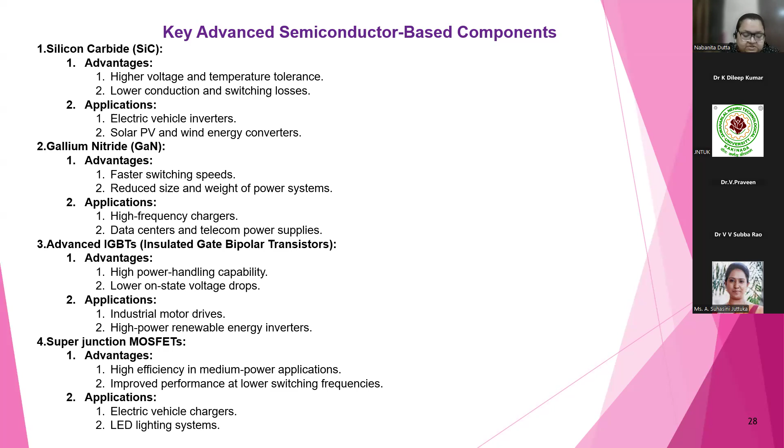There are some modular key integrated power modules, such as motor drive modules, used in electric motor drives, including industrial motor and HVAC systems, for efficient and optimized design of motor control. Integrated grid drives, solar power inverters, and UPS systems provide high efficiency systems.

The key challenges facing power electronics for smart energy systems are high voltage and current stresses, thermal management, and harmonic distortion. There is a lot of harmonic distortion when dealing with very high power systems, and harmonic mitigation is part of this key challenge for any module, simulation, or application. We need to mitigate this harmonic distortion.

There is also intermittency with renewable energy resources and complex control strategies. When using advanced control technology, the control technique definitely becomes complex, so it may not be user friendly, and there are initial cost and life cycle cost considerations. These are the economic challenges for power electronics when we use advanced power electronics techniques in smart energy systems or renewable energy applications.

Then there is compatibility with legacy systems, and some policies as well, creating challenges with scalability, and sometimes legal issues. E-waste is also a challenge for the environment, and regulatory standards and cyber security risks also exist, along with power theft issues.